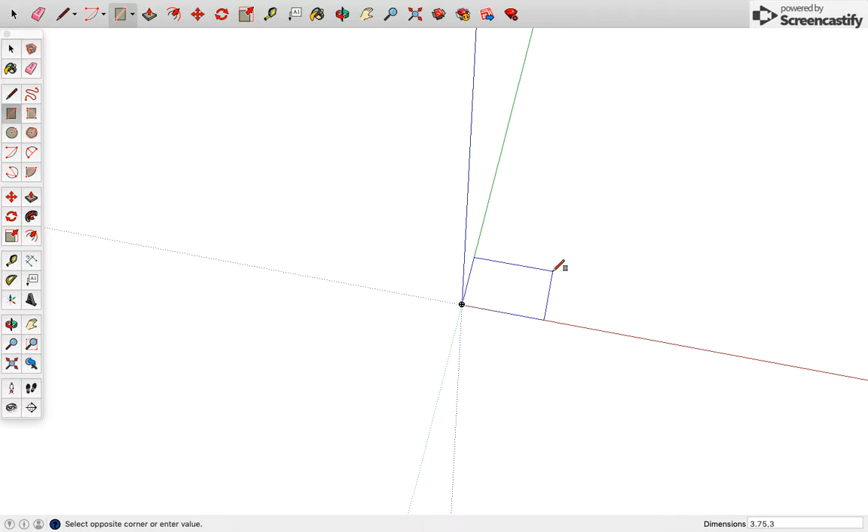This is a drawing tutorial for drawing 4. I'm going to open up SketchUp and make sure you have the appropriate tool sets. For drawing 4, the base of our object is 3 3/4 by 3 3/4. So we're going to start by creating a rectangle from our origin that is 3.75, 3.75. We'll zoom into our shape.

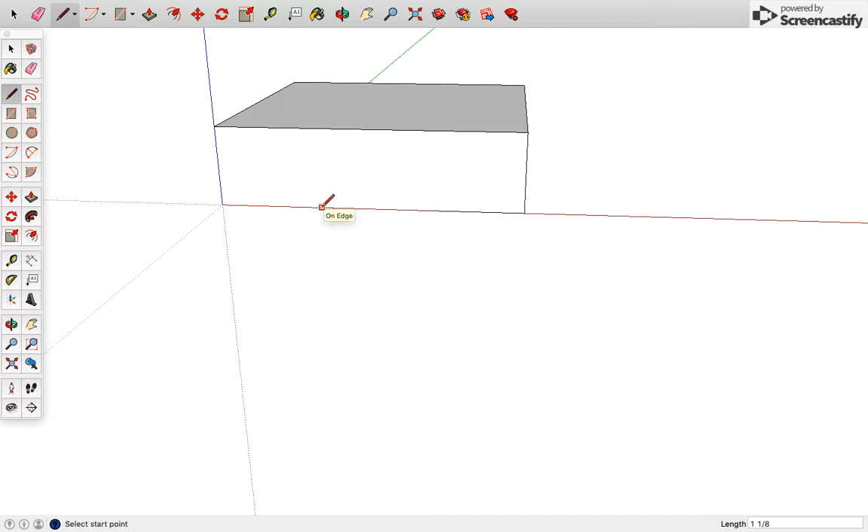From there, we're going to push-pull. That object is a height of 1. Zoom in here. Now, from the front, we can see that there's a cutout here, so we're going to key that in using our pencil tool. Going to come over the distance of 1 1/8. Hit enter. Find the end point of that line by hovering over.

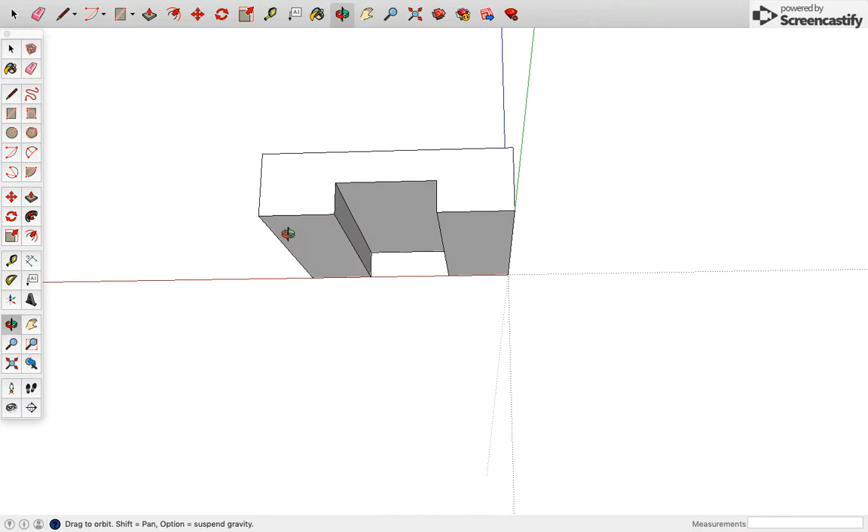It turns green. We can come up a distance of 0.5 and over a distance of 1.5. And then we can come straight down. We can use our push-pull tool to pull that through our shape, and that piece is cut out. We'll need to do the same thing on the other two sides.

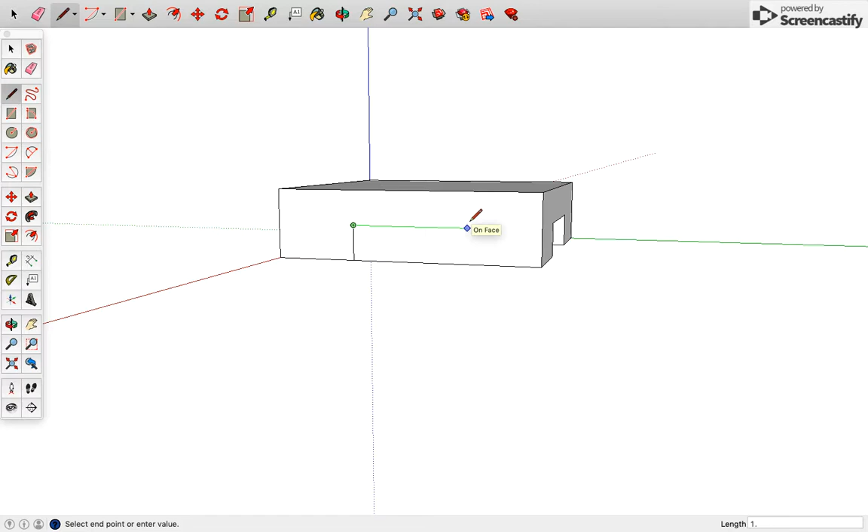So if we use our pencil tool, come over from the corner a distance of 1 1/8. Find our endpoint, come up a distance of 0.5 and over a distance of 1.5 and straight down. When we go to push-pull this section, it's going to leave a face here. So we're going to use our eraser tool and click on that bottom line and this top line to get rid of that component completely.

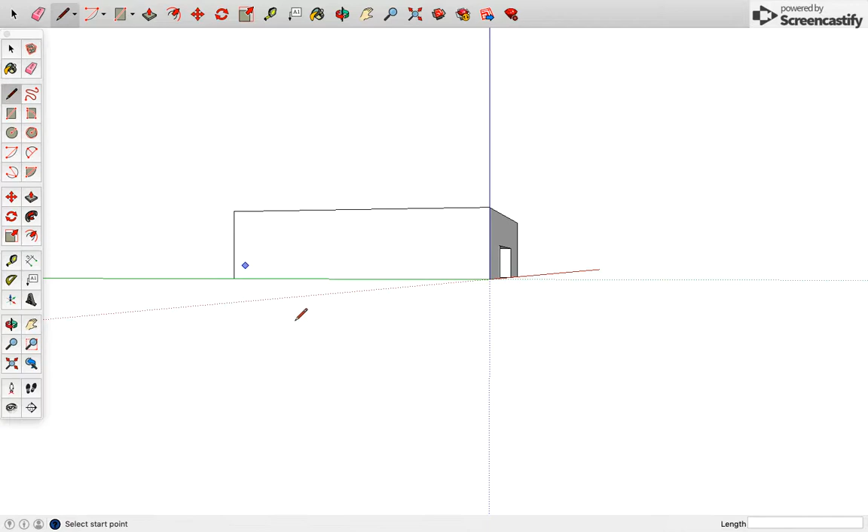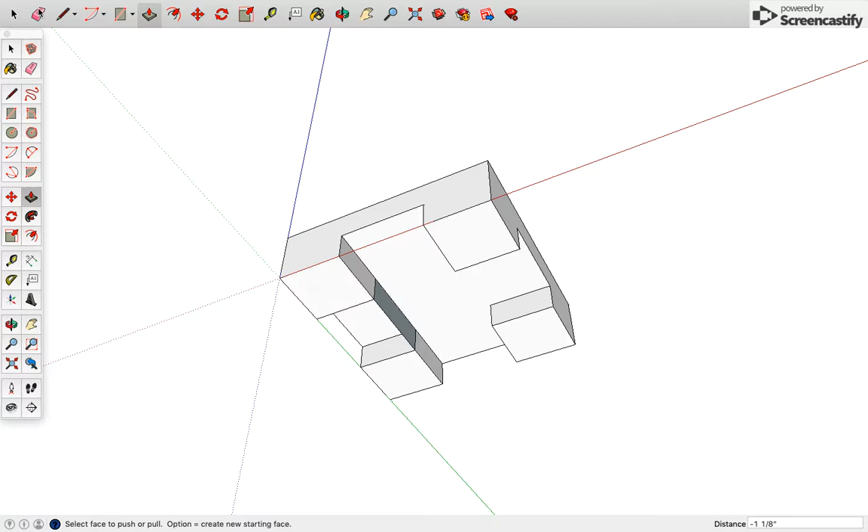We'll have to do that on this other surface. Start from our corner, distance of 1 1/8. Find the endpoint, come up a distance of 0.5, over a distance of 1.5. Same process. We will push-pull that through the object, use our eraser tool to erase the two lines. The bottom of your drawing for drawing 4 should look like this. All the corners should be identical.

To get started on the top, we're going to do the cylinder in the back corner. We're going to use the tape measure tool to find the center of that cylinder. On your print, it lists the diameter as 1.5 inches, and it says the center of the cylinder is located 1 1/8 inch from back and side edges. So we're going to come from the back edge a distance of 1 1/8, and we're going to come in a distance of 1 1/8.

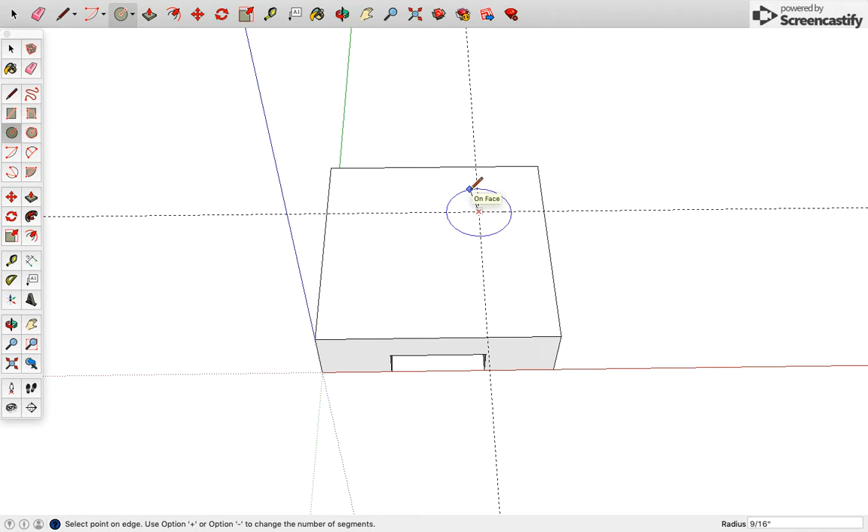Now, this is the center point of our circle, so we can select our circle tool, click on the center. We need to be careful here because in our print, it's listing diameter, and SketchUp is asking for the radius down here. So if the diameter is 1.5, the radius is 3/4. So I'm going to type in 0.75. Once you have the circle drawn, you can use the push-pull tool, and the print lists the height of the cylinder as 1 7/8.

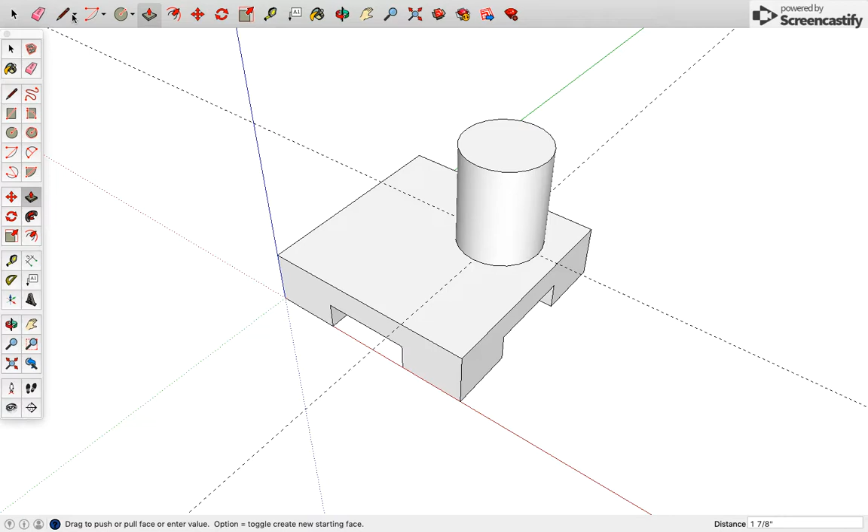Now, these dimensioning lines are going to kind of get in our way, so I'm going to erase them so they're no longer in the drawing. From the front, we can see that there's kind of a pyramid on the front of this object. We're going to use our pencil tool to find the ends. The print has a dimension as 1/2 inch in, so 0.5. And we're going to do the same on the other side, 0.5. Then I'm going to find the center of this line. It's going to identify it as the midpoint.

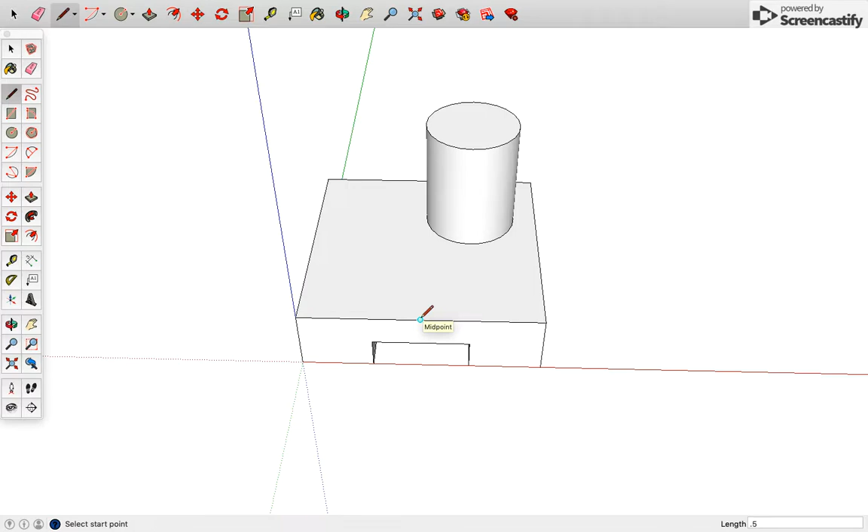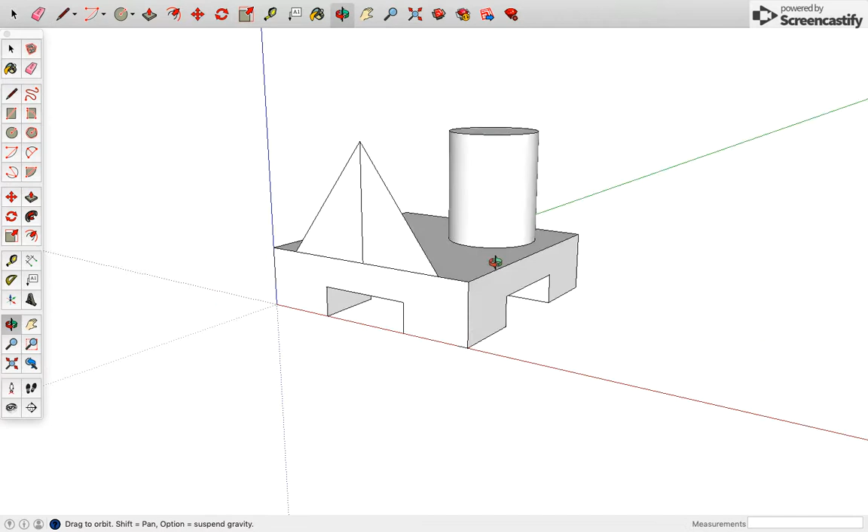We're going to make sure we're going straight up. And the height of this triangle is 1 7/8. So I'm going to type in 1 7/8. And then I can come down from that to the end points of the lines I made previously, which are 1/2 inch in from the edge. And that's going to draw our triangle. We don't need this vertical line anymore, so I'm going to delete that.

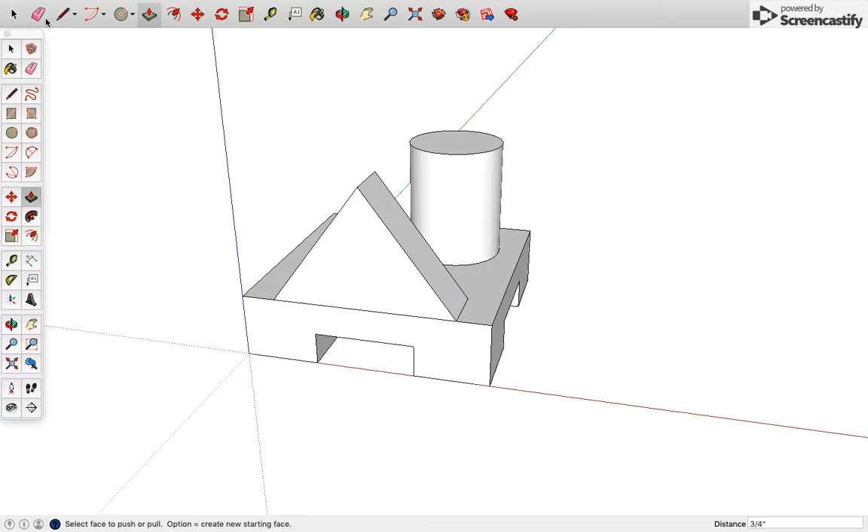I'm going to rotate around, and we're going to select our push-pull tool, grab our triangle. The triangle has a thickness of 3/4, so 0.75. And now we can go back to the front and we can delete this bottom line. The next thing is the rectangle that lives kind of behind the triangle here. That rectangle is from the center of this. So if I highlight over, we'll see if it'll give us a midpoint. There, it gave us a midpoint.

This would be lined up with the center of it. So from there, we know that the thickness of the rectangle is 0.75. Come over 0.75. I'm going to sketch straight to the end. If I select that corner and draw over, it's going to give me a point and close in my rectangle. Now I should be able to use my push-pull tool, select the rectangle, and bring it up. But it's actually flagging. It's not going to let me extrude that up.

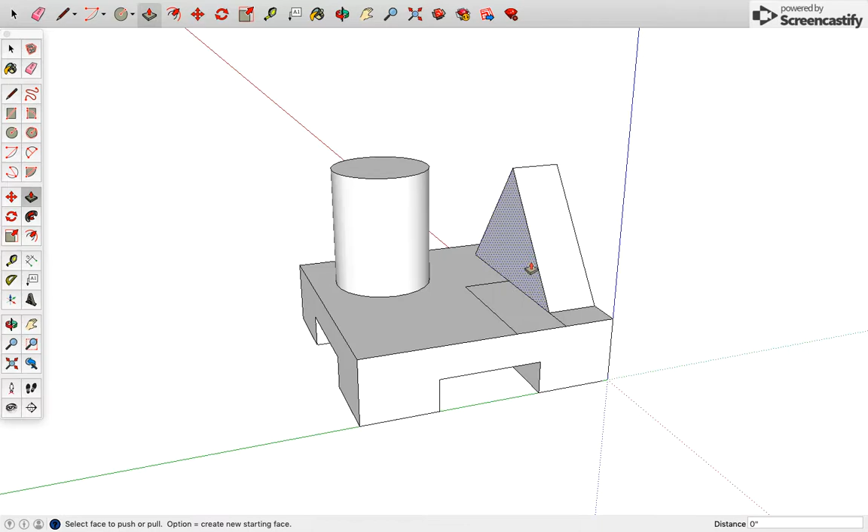It would let me go down, but because it's having a hard time figuring out what to do along the triangle, it's not going to work. Once in a while in solid modeling, we run into problems and we just work around them. So rather than push-pulling, we're going to 3D wireframe this. So that means I'm just going to sketch all of the sides of this object. From here, we know the height. I'm going straight up. The height is 1 7/8.

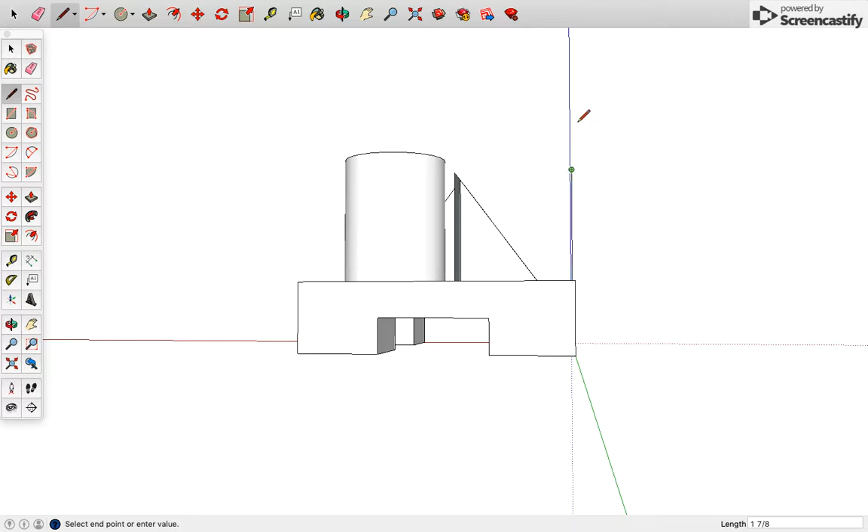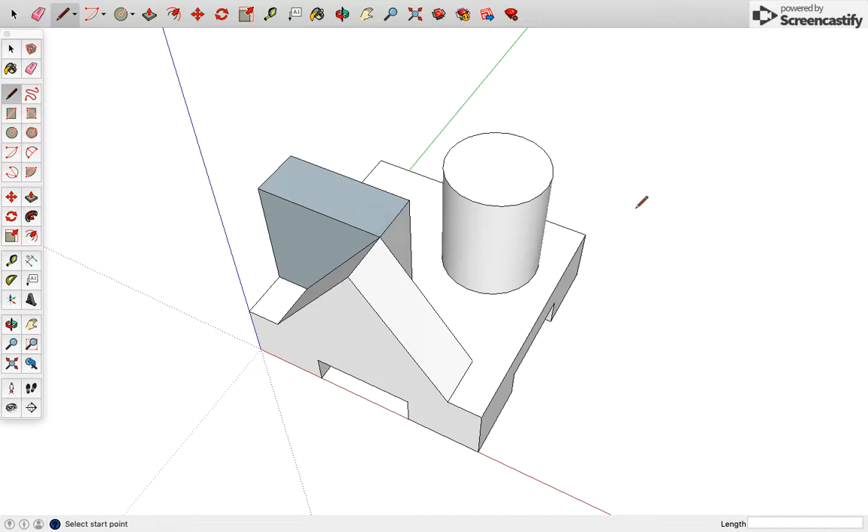We know the thickness is 3/4. We can come straight down. So rather than push-pulling, we're just going to draw all of the lines in. So now we've got the triangle, the extruded rectangle, and the cylinder. We've cut out the bottom pieces of our view, and that concludes the tutorial for drawing 4.